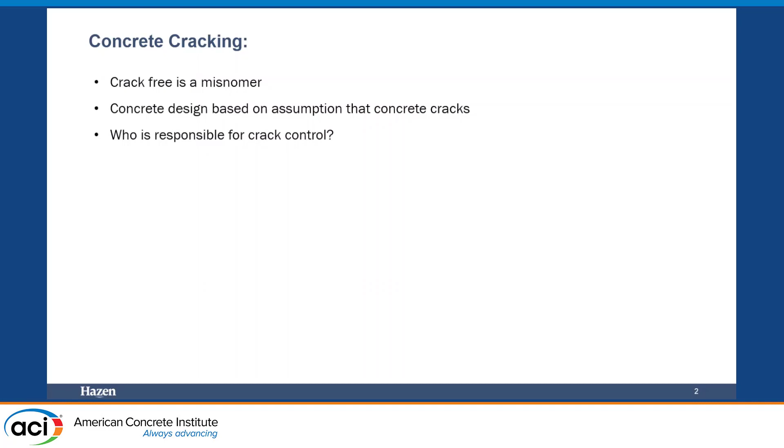And if we are looking at crack control, that begs the question, who's responsible for the crack control? In my opinion, everybody plays a role in the responsibility. Owners need to have realistic expectations. They need to clearly establish their goals so that the engineer and the contractor understand those. Engineers have a planning, design, and specification responsibility in order to specify the concrete to best achieve those goals relative to the layout and the design required. Contractors and producers have a construction responsibility to mix and place the concrete to help achieve all of the goals. So to me, it's a shared responsibility, and communication is critical to achieving the desired results at the end of the day.

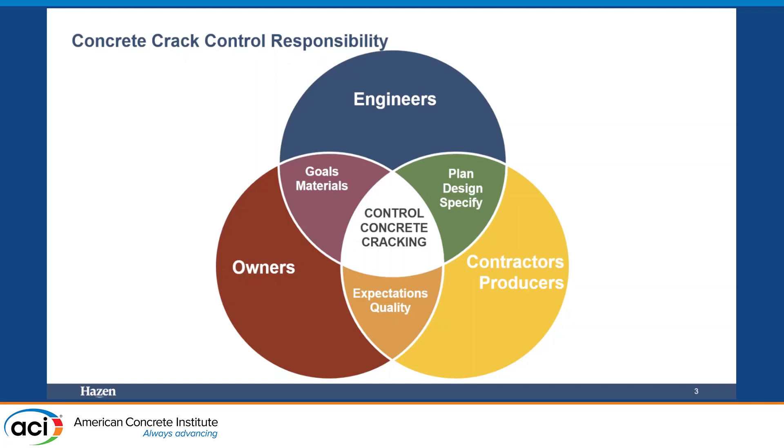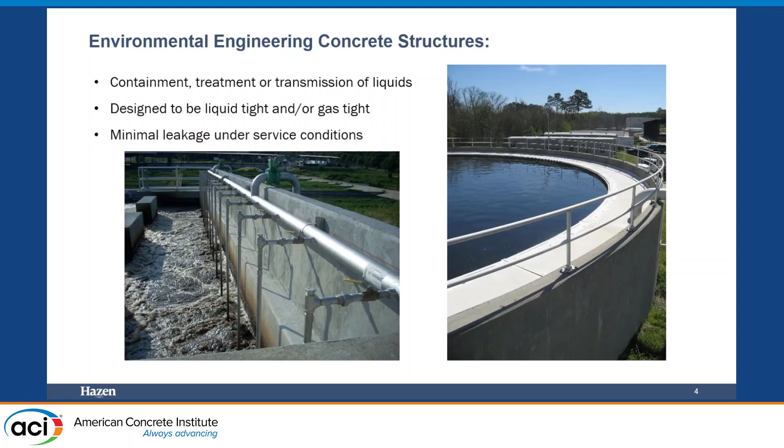These are the type of structures that I typically design. One, for durability, is a key requirement. In fact, in 350, we consider it a limit state. Our structures contain, treat, transmit liquids. We need the concrete to be liquid tight or gas tight, and we need it to function under service conditions, which are generally fairly high, with minimal leakage.

Our concrete can also be subjected to aggressive environments. The concrete here was about 10 years old when this deterioration was discovered. There was biogenic corrosion that had eaten through the concrete protective coating that had been installed on the concrete and had started in on the concrete matrix itself. The section loss here was around 4 to 6 inches, not exactly what you'd be expecting to see if you're an owner and your concrete is only 10 years old.

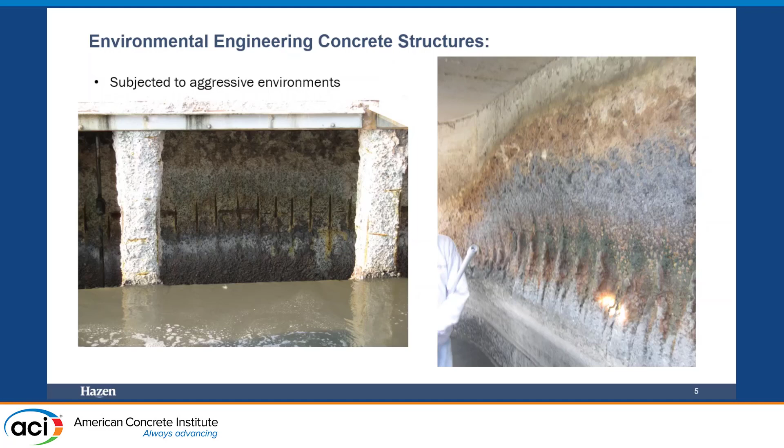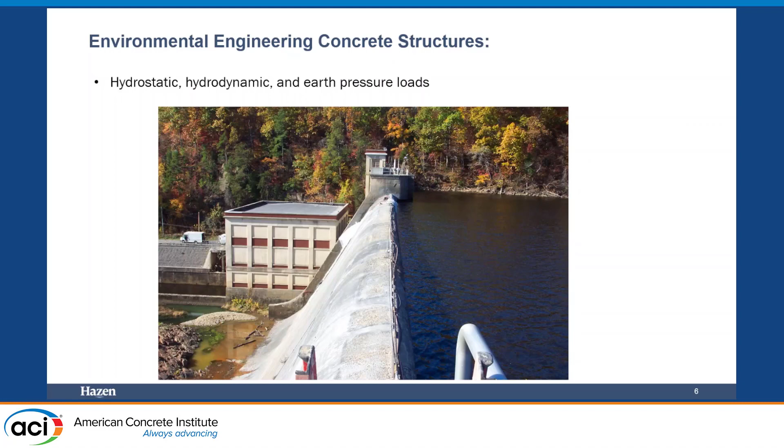Our loads can be pretty significant. There's about 4 stories of water behind this concrete dam, so that is no small change in terms of pressures. So if we're looking to focus on crack control and design for that, we need to make sure that we've specified the concrete mixture with that goal in mind, that we design the members for strength, and that we've provided the reinforcing necessary, including the minimum temperature and shrinkage reinforcing. We want to make sure that we've located the joints, either through hard locations on the drawings or specifying maximum restrictions for the contractor's means and methods to place and cure. We also want to make sure that we are focusing on placing and curing properly so that the concrete can achieve what we want it to have at the end of the day.

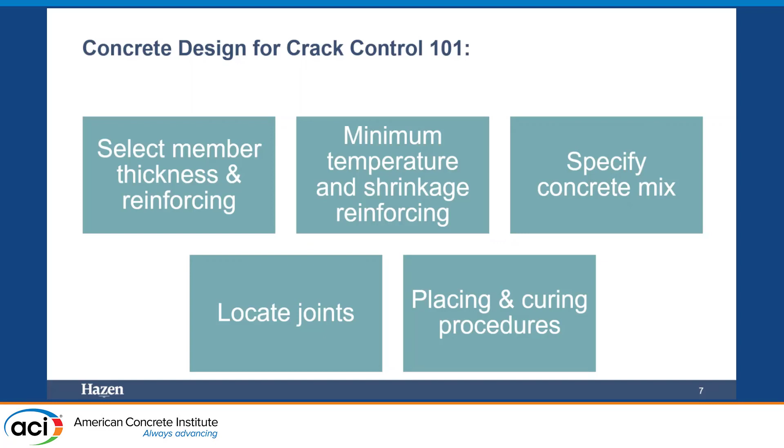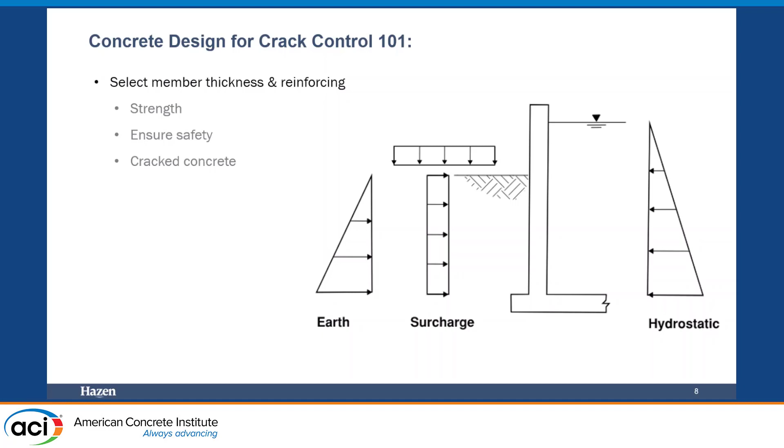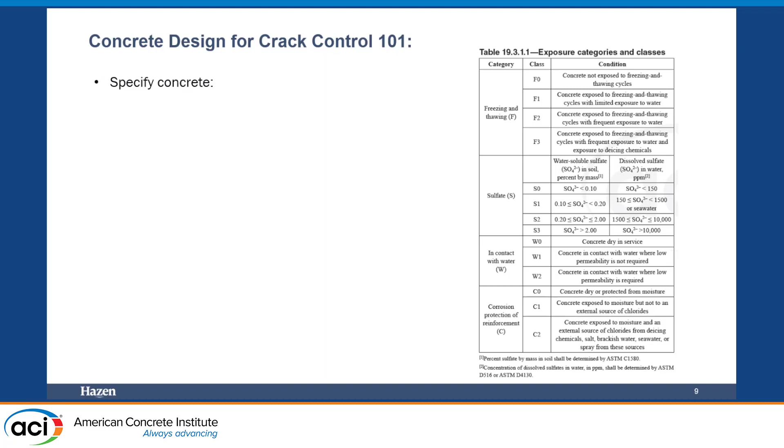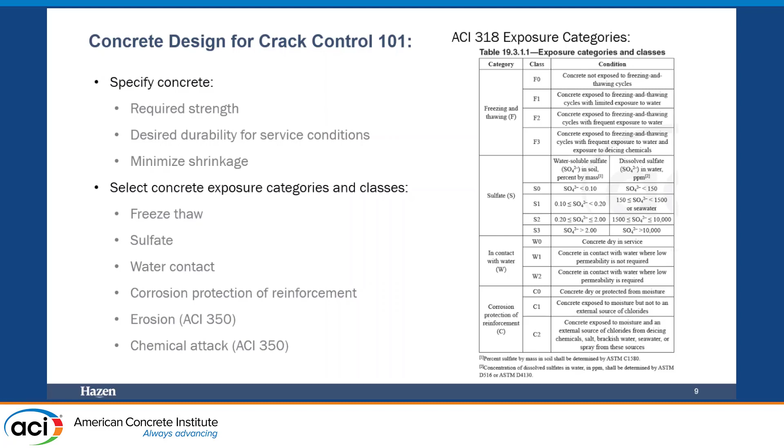This is a part of trying to make sure that you maintain the durability or the serviceability of your structures. Our 350 tables are a little bit more in depth because some of our exposures are more restrictive than what typical building structures would have. So those exposures are going to make you look at required strength, minimizing shrinkage, typical exposure conditions for your freeze-thaw, sulfate contact, water contact, corrosion of your reinforcement. For environmental structures, erosion and chemical attack are also exposures that we typically deal with that wouldn't be present for a general building structure.

For freezing and thawing, and sulfate, the tables on the left and right are the 350 exposure categories. Let's go through these real quick.

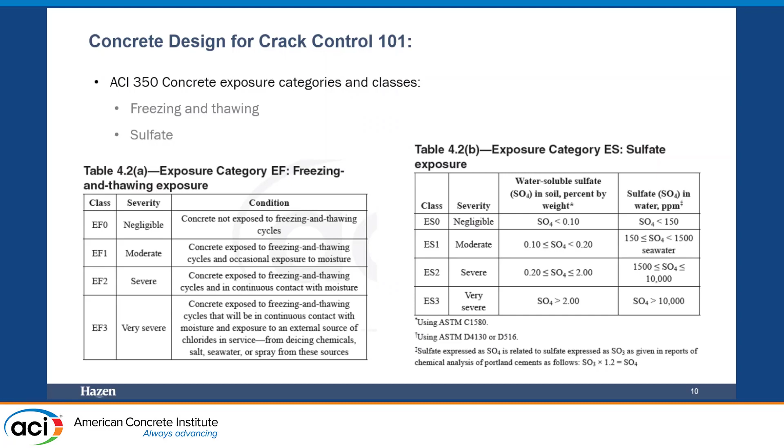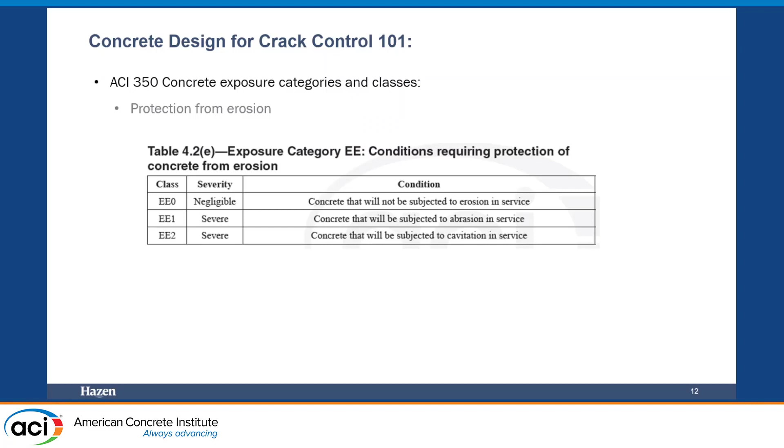I'm sure you can think back to the dam I showed with four stories of water and imagine the velocities that water displays going down the face of the dam, and the erosion you could get from that. Looking at a brief example, we have a process tank here at Deer Island, which is due east of Logan International.

We would have a freeze-thaw durability exposure category of EF2. We have freezing and thawing temperatures here in this area, and for sulfate, this is a wastewater structure, so it would have a sulfate exposure of ES2.

For EC, our corrosion reinforcing exposure category, we'll say it's an EC2 due to the potential source of chlorides present from our coastal environment, as well as the potential for chlorides often in the treated water.

Our chemical attack, we'll say, is an ECA1 for this particular example, since we're not expecting chemicals that would corrode the concrete beyond a faster rate. We're looking at a slower rate of corrosion.

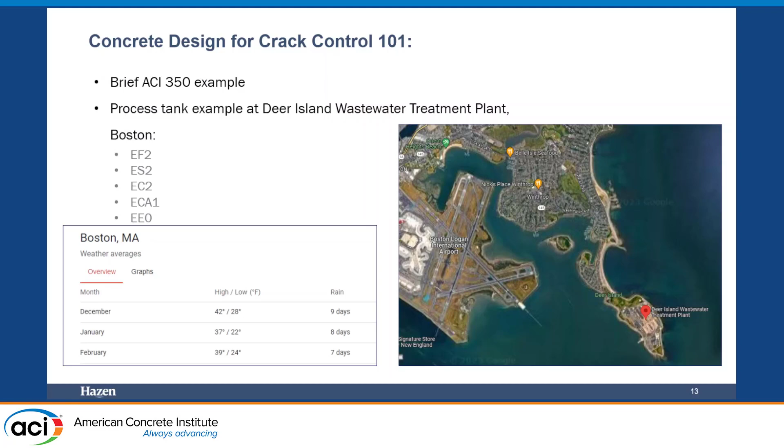And then for this particular structure, velocities are lower, and we would have an erosion class of EE0.

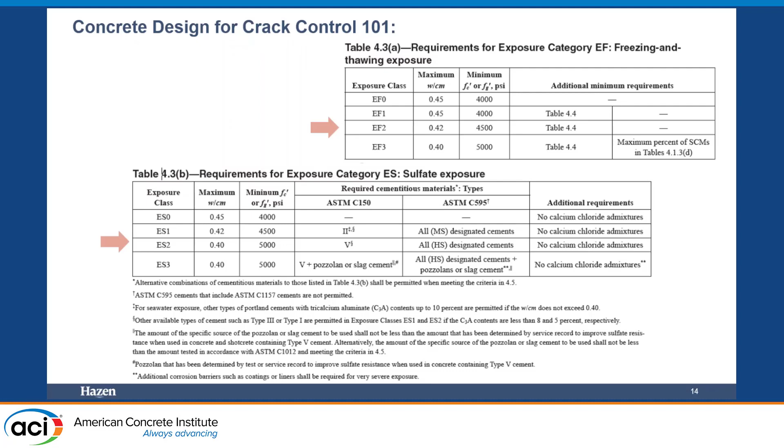So you go through the tables, and as you go through each of your exposure categories, you go across to get your compressive strength requirements, your minimum compressive strength, your maximum water-cementitious materials requirements, and in some cases there may be additional requirements relative to cement type, air, or pozzolans, depending on the exposure requirements. You go through those for each of the exposure classes.

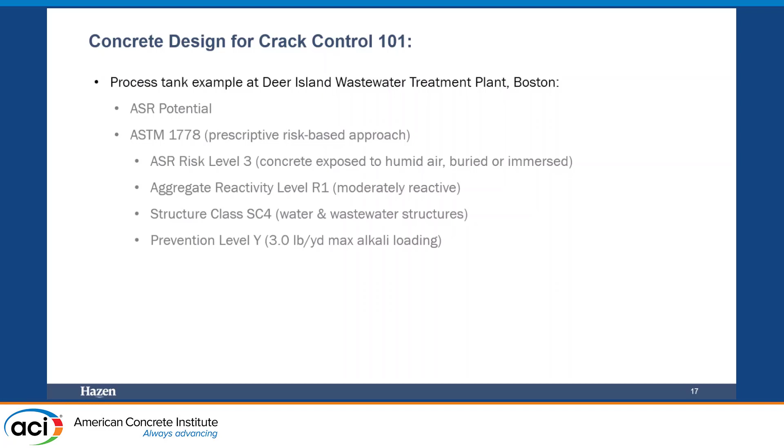You should also consider ASR, the potential for alkali-silica reaction for these types of structures. We're often assuming a risk level 3 with an aggregate reactivity level R1. Water and wastewater structures would have a structure class of SC4, which would give us a prevention level Y with a requirement of 3 pounds per yard for maximum alkali loading for those givens.

So you put all of that into a table and compare what you end up needing, and when you look at your controlling compressive strength and your controlling water-cementitious materials ratio, we would find we need a 5,000 psi concrete with a maximum water-cement ratio of 0.4.

For this particular example, we would also need to look at Type 5 cements or Type HS 595 cements. We also have maximum chloride restrictions, air entrainment requirements, and pozzolans would be recommended to help control aggregate expansions. I haven't included on the slide some additional pozzolan restrictions relative to maximums and minimums, depending on your freeze-thaw requirements, since that's a bit more than we were going to cover.

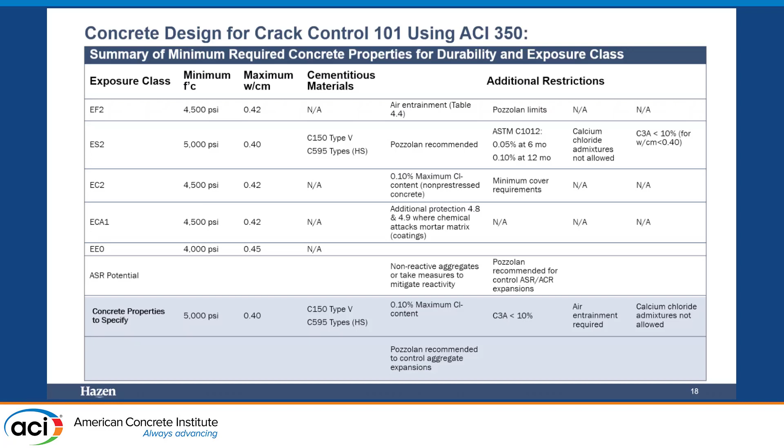You also want to make sure that you have reinforcing designed for the temperature and shrinkage stresses that would be experienced during placement.

If concrete is placed and is free to deform, it just shrinks and you experience no stress. But the reality is, after you place the concrete, it's going to be restrained by other elements, beams, columns, walls. There will be something else that restrains it, and when that happens, you get tensile stresses developing in the concrete. When the concrete cracks, it is relieving those stresses.

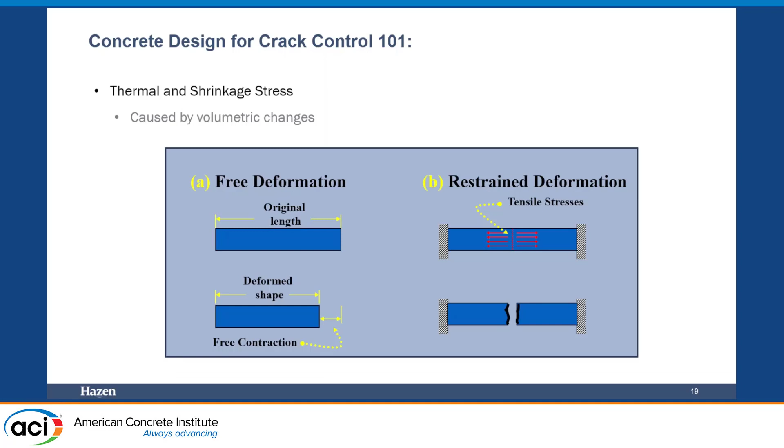Your compressive strength is much greater than the tensile strength. Tensile strength is only about 10 to 15% of the compressive strength, and cracking starts when you reach that tensile strength of concrete. Unless you gain enough strength concrete-wise for your reinforcing to be effective, you're going to see the cracks develop.

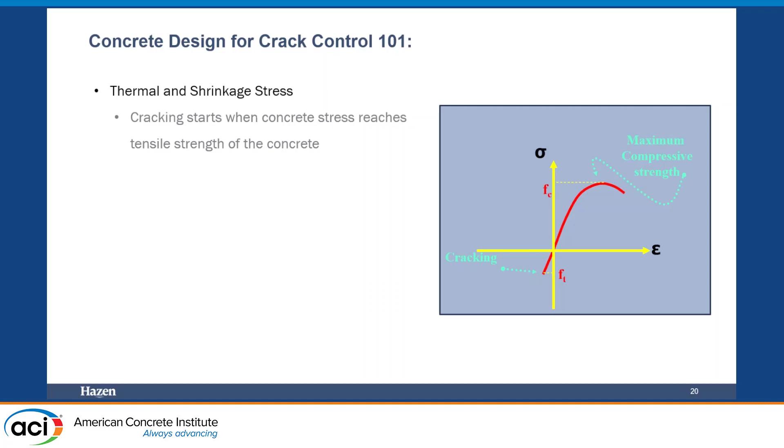So we want minimum temperature and shrinkage reinforcing to tie the structure together. Yes, that's 318's goal for providing minimum temperature and shrinkage reinforcing. For environmental structures, we also want to minimize the excess cracking that can occur. That temperature and shrinkage reinforcing is perpendicular to the primary reinforcement.

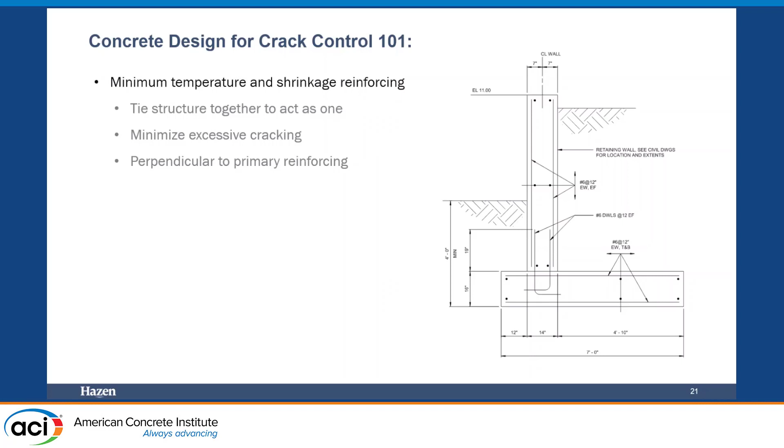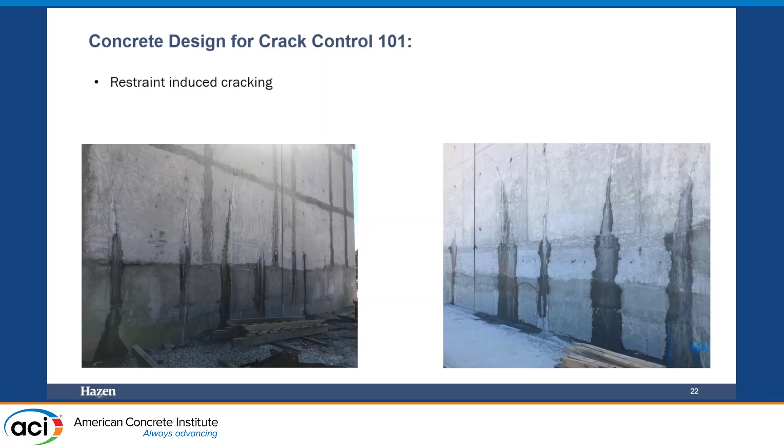One of the most important tools for minimizing cracking is joints. Joints allow for movement and provide a construction convenience, but that's not the only reason to use them. They help manage stress and minimize cracking.

All of the joints should be shown or indicated on construction drawings or documents, whether specifications or drawings, whether they're hard-located on the drawings or specified at maximum distances.

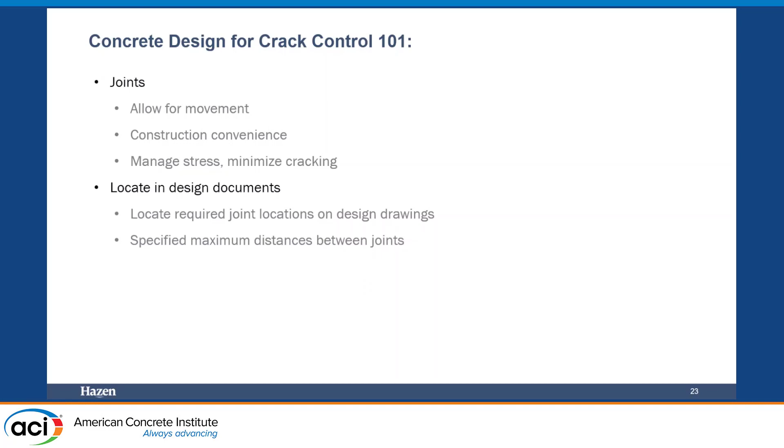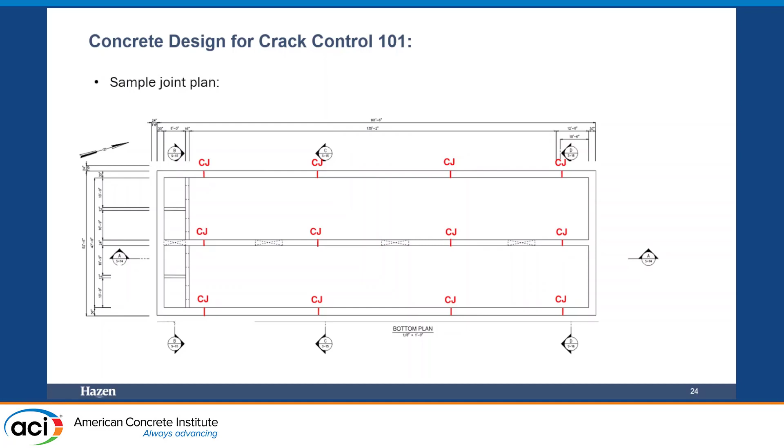Just an example here. I typically like to locate joints where the aspect ratio is around 0.75 to 1, to help control and distribute. Our goal is to get many fine cracks rather than fewer wider cracks, so there's less potential for leakage in these type structures. For general building structures, that may produce a better finish if you're looking at an architectural wall.

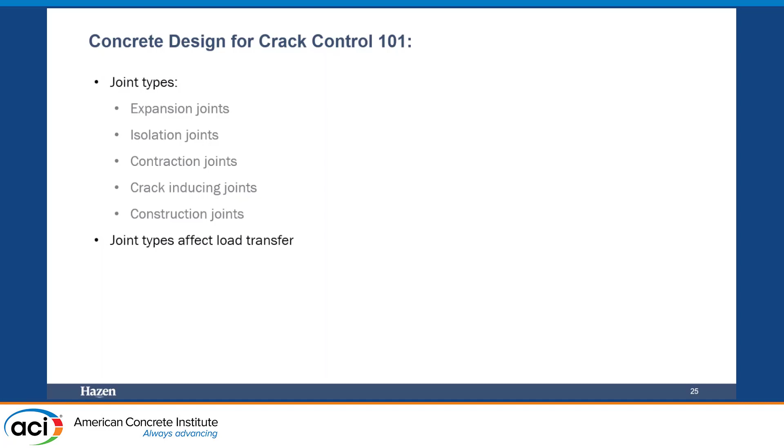So joints and reinforcing are critical, I think, for helping to manage the crack. Several different types of joints, grouped here: expansion joints, isolation joints, contraction joints, crack-inducing joints, and construction joints. Some, but not all, of the joint types listed affect load transfer. The ones that do affect load transfer should be coordinated with the design engineer of record to make sure the design has accommodated that.

The expansion joint has a physical separate placement - bonded reinforcing is discontinued at the joint, but there are slip dowels cast in that allow movement in the plane of the joint, but prevent relative rotation of the two sections of wall. The walls can rotate, but the dowels will help make sure the wall works together as one unit.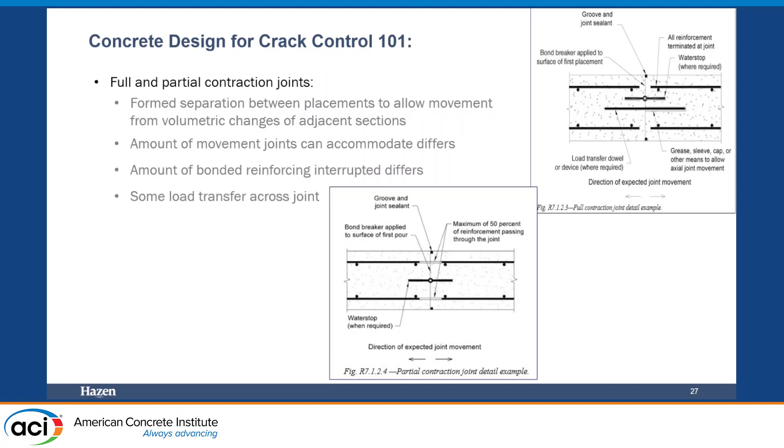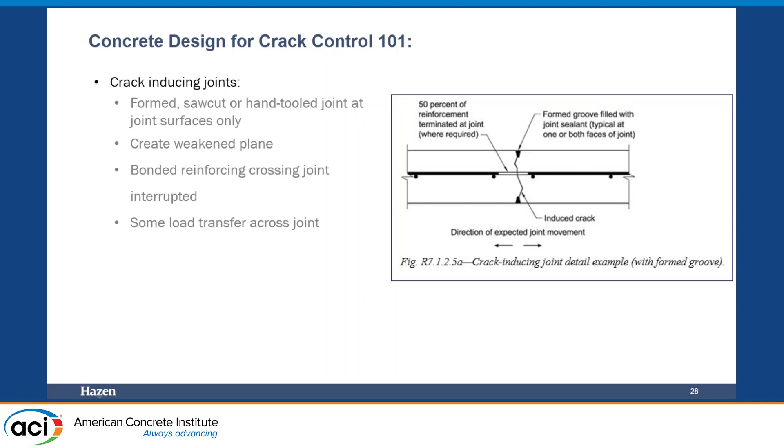Crack-inducing joints are most often seen in pavement design, where you have a formed groove, sawn groove, or a tool joint at the surface, which reduces the section at that location with the goal of inducing a crack at that place. It works better in thinner members, not as well in thicker members. Many times I've seen the sawn joint and the crack right adjacent to it doesn't always align with where you want it to go, even though you've weakened the section at that location.

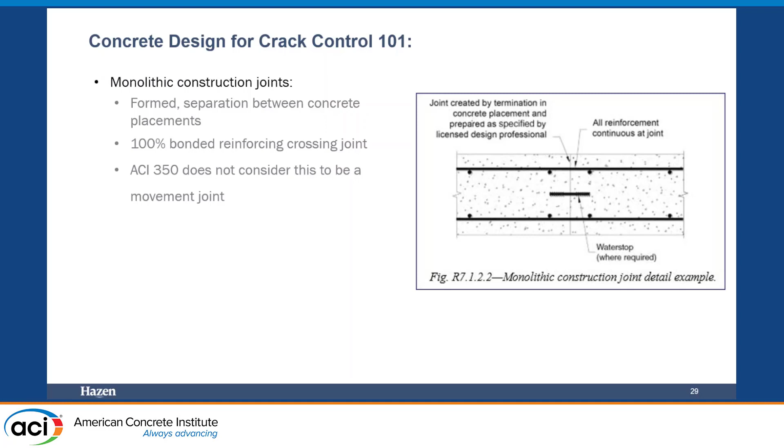Monolithic construction joints - you still have two physically different placements, you've broken the pour, but there is no physical separation between the two abutting placements, and all of your bonded reinforcing crosses the joint. So from a design perspective, you can transfer full load across that joint, but that joint doesn't have a lot of movement capability. You also want to make sure you place your concrete and cure it so that you minimize the drying shrinkage.

I wanted to touch briefly on unintended impacts of withheld water. If you trim water at the batch as you're batching, and that water is never added back into the truck, what is the final placed water cement ratio of what you have? Maybe your 0.40 water cement ratio, if you trimmed the water, now became a 0.38 or less, and you begin to risk early age cracking unintentionally by trying to go down that path.

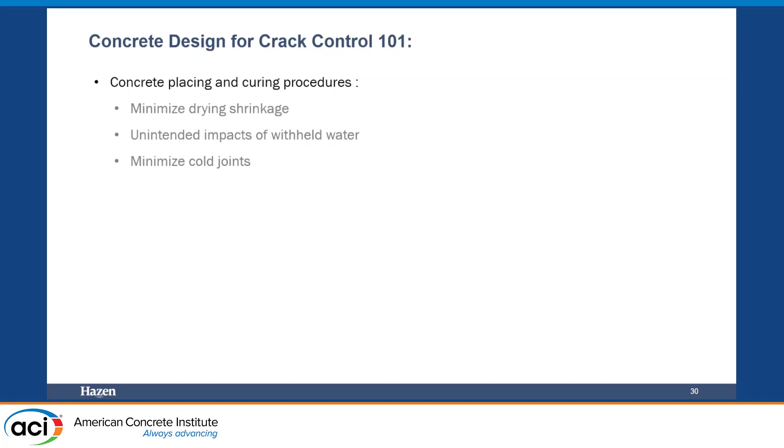So just something to keep in mind - also want to minimize cold joints if possible.

So in summary, we design concrete assuming that it cracks. Everyone needs to understand that going into the project, and crack control requires responsibility from all in order to achieve the goals that are desired. We need to make sure we specify the strength needed for the durability or serviceability needs of the project, and we also want to look at the importance that joints play in trying to achieve those goals. You need to make sure you've designed and included proper reinforcing to accommodate thermal and shrinkage restraint.